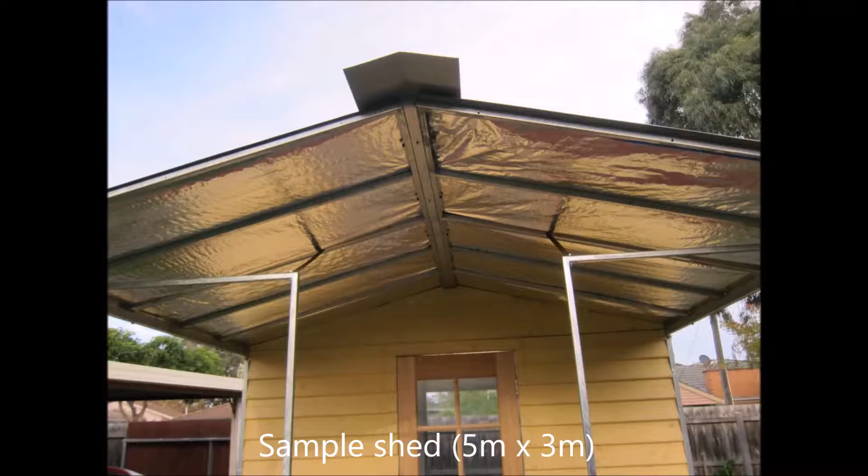Integrated Modular Outdoor Structures, IMOS, is specially and purposely designed for big hardware chain stores where maximum possible range of products should be presented to end customers with minimum possible investment.

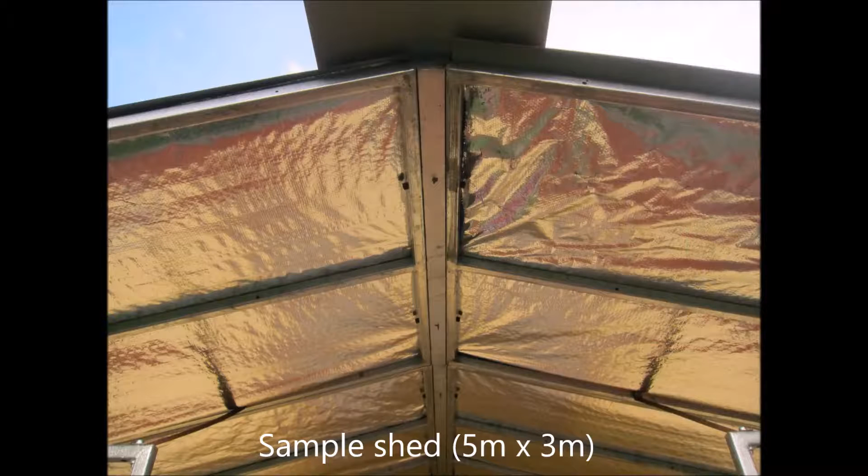An appropriate product must be cost-effective, easily stackable, user-friendly, do-it-yourself, easy to assemble and disassemble with minimum level of skills, easy to carry within store and by customers' small vehicles, easily extendable and retractable, light in weight, reusable, relocatable, long-lasting and durable, maintenance-free, sustainable, mistake-proof in assembly, and prefabricated and machined precisely.

After 4 years of working hard on this project, we believe all mentioned criteria have been met to satisfy big hardware chain stores' requirements. In this short video we are trying to show you brief information about IMOS's advantages, capabilities and competencies.

First, selling a very limited number of individual parts instead of heavy and bulky flat packages. We know that hardware chain stores, and even medium-sized retailers, prefer to minimize the amount of stock they keep in their warehouse to avoid heavy investment.

Using our online fully automated configuration system located on our website, warehouses don't have to stock huge amounts of goods, only a very limited number of products. Our system actually turns that around. How does this work? It's quite straightforward and efficient, in 3 simple steps.

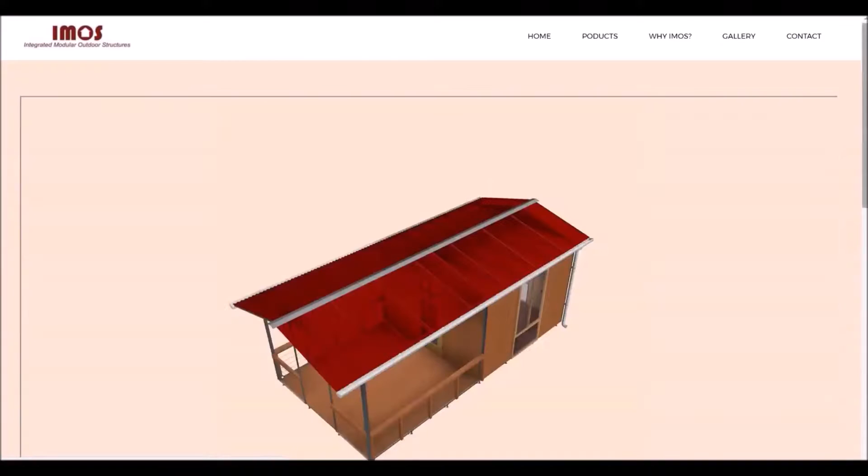Step 1: using our website, choose your own appropriate product, let's say a shed with 3 meters width. The 3D fully assembled product can be seen with acceptable resolution. You can also rotate the model around, or zoom in to get inside the 3D model to find out what the finalized product looks like.

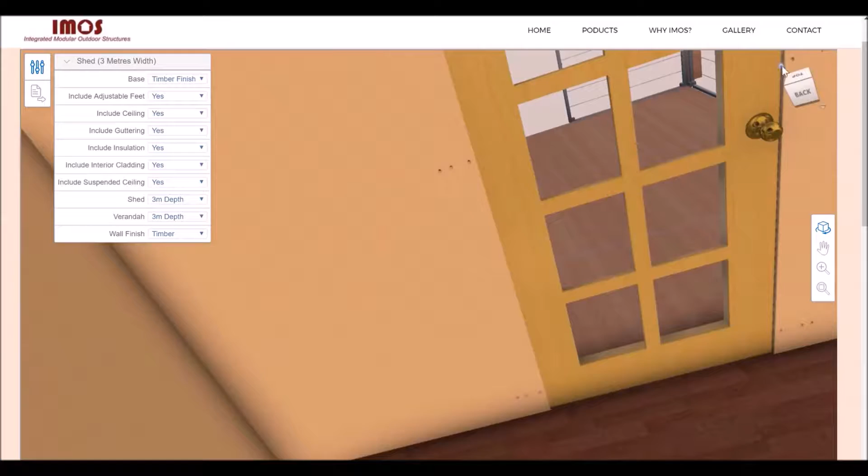Step 2: using the drop-down menus, pick your own desired parameters to make changes to your product. For example, in this product you can change shed depth, veranda depth, floor finish, wall finish, suspended ceiling, interior cladding, adjustable feet, guttering system, insulation, or even remove the roof to see what's going on with the suspended ceiling.

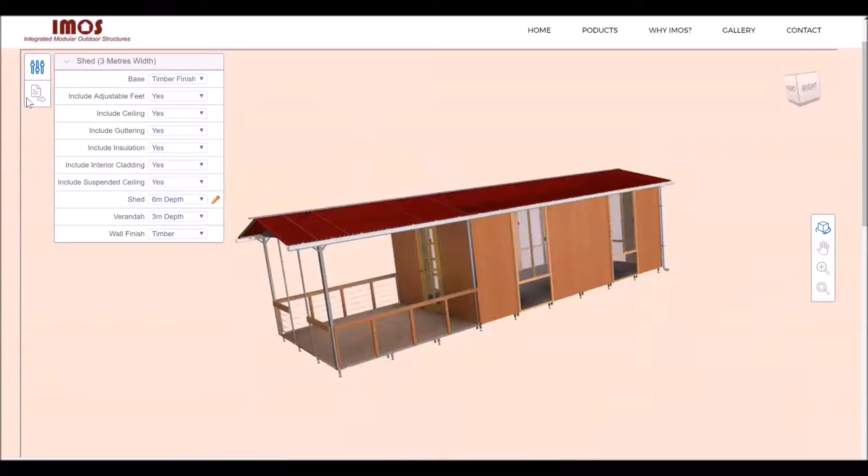Step 3: download the bill of material to see all the parts required for building the shed, including quantity, part number and description for each part. In the warehouse, each actual single part is labeled with a unique part number and description. The only thing the end customer needs to do is pick up the required labeled parts from the warehouse.

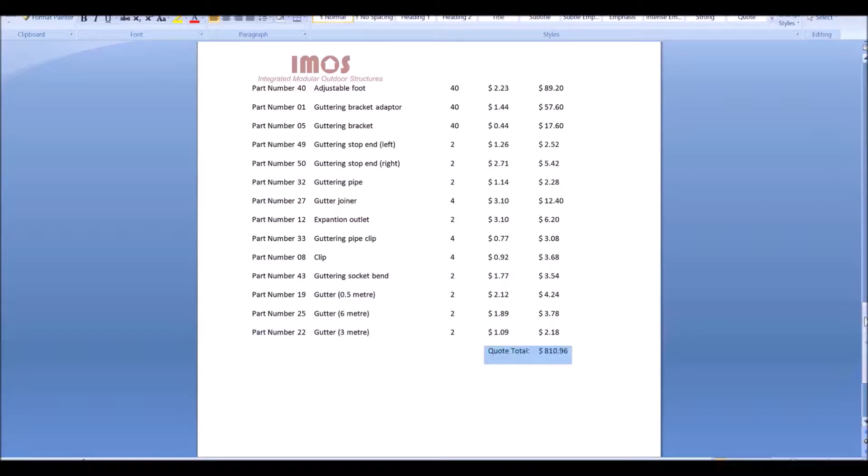Fourth, a fully automated instant quotation system. Customers can find out the total cost of the project, unit price and amount. Each time you change the parameters, the bill of material, total project cost, unit price and amount will be updated automatically according to the new product.

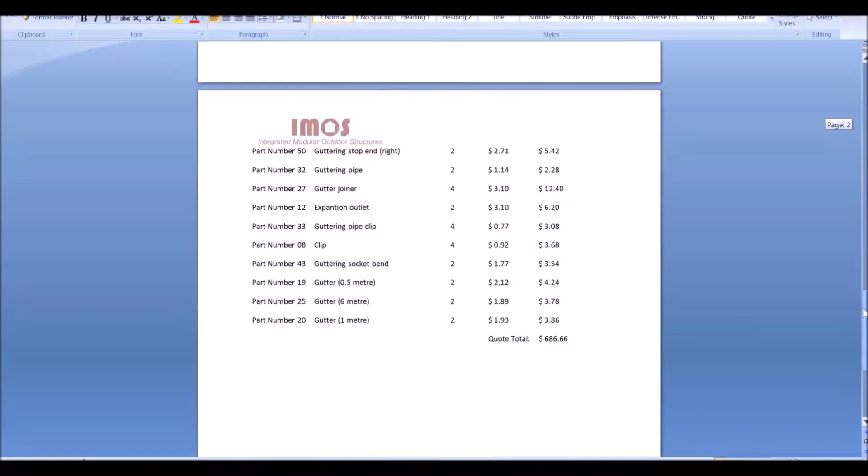Also, a photo of the finalized product and a short message to end customers is included in the downloadable document. Fifth, each product has its own step-by-step assembly instruction animation video.

You just need to play the related animation and follow the steps. In the animation video, each individual part is labeled with its unique part number and description.

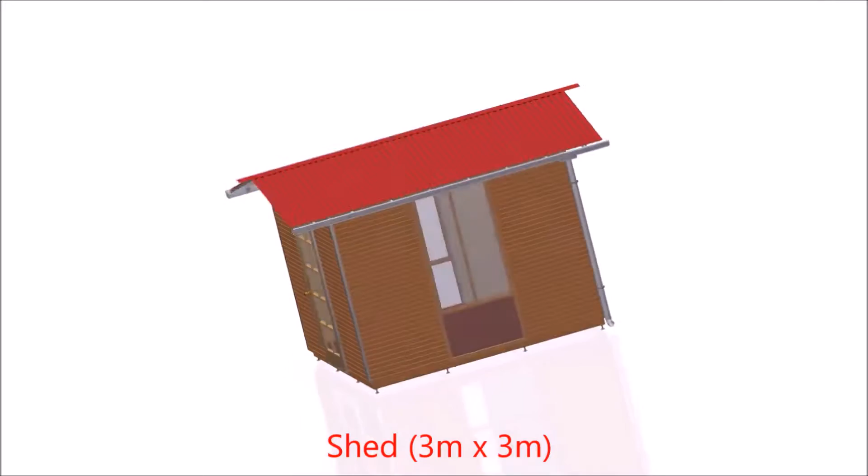Second, providing a quite wide range of products by stocking a very limited number of individual parts in the warehouse. This includes sheds with or without veranda in unlimited sizes and configurations. All the sheds can be extended in an interval of 1 meter longitudinally and/or laterally, up to infinity in all 4 directions.

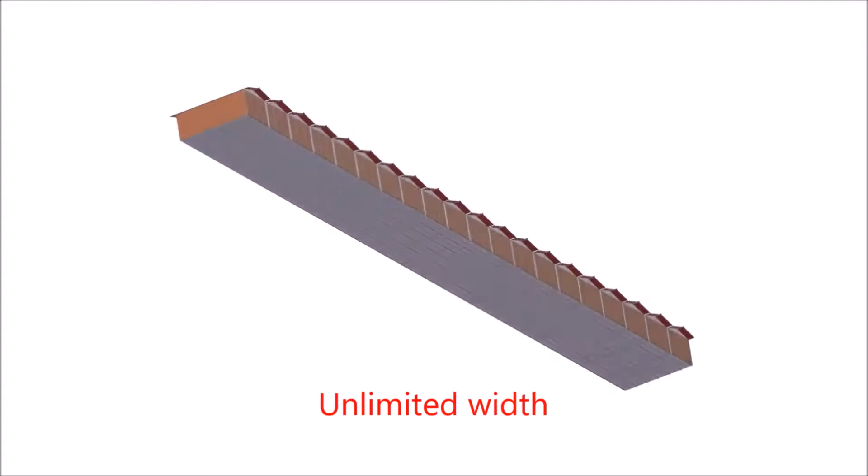For example, this shed can be extended, let's say 20 meters longitudinally and 20 meters laterally, which is 400 square meters of roofed area. Later in this video we'll show you how incredibly easy it will be assembling, extending and retracting the sheds.

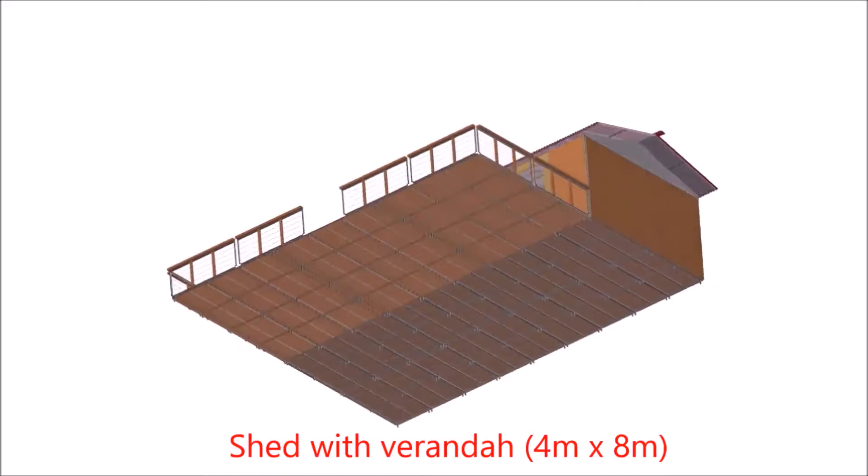The smallest size starts from 1 meter longitudinally and 2 meters laterally, so the smallest shed is 2 meters by 1 meter. There are different finishing options for walls and floors. For example, in the wall panels the exterior cladding can be wood or Colorbond, and in floor panels the finish can be particle board, laminate or tile.

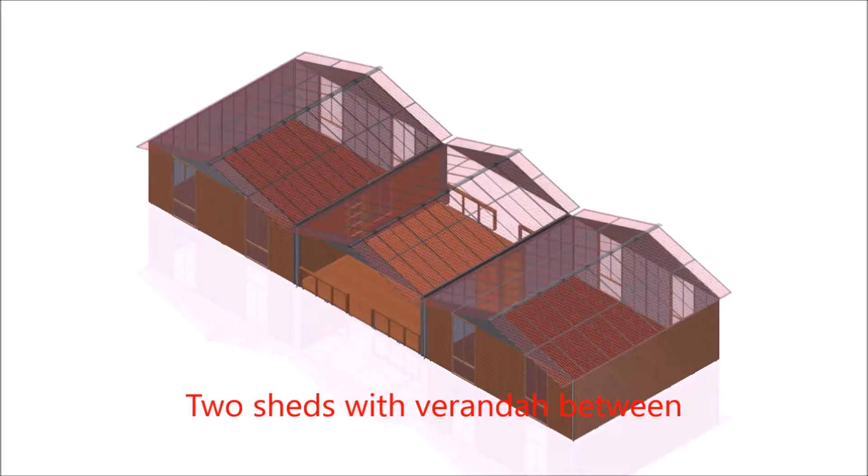Also, there are different levels of accessories, from entry level, which could be a storage garden shed, to high-end options which could be a granny flat, with suspended ceiling, interior cladding, adjustable feet, insulation and guttering system, which can be added optionally by end customers.

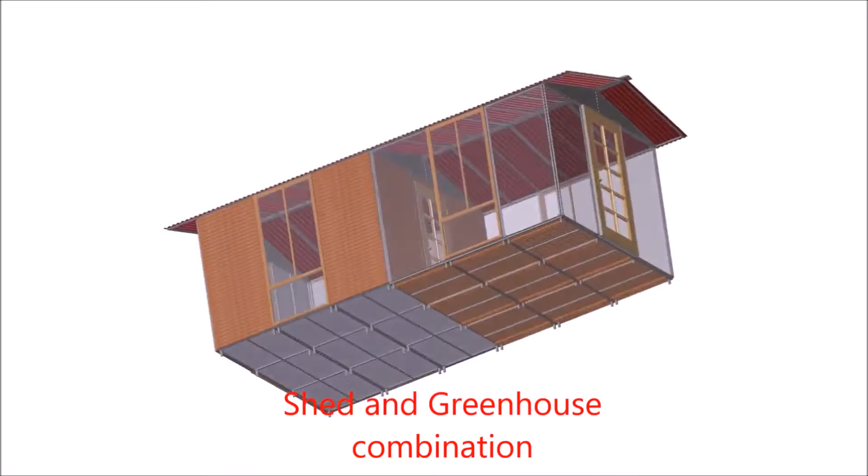All the sheds with any size and configuration can be built up and bolted directly into slab, soil, grass, asphalt or tile where the base being attached to the shed is not required. Adjustable feet in different sizes also can be used for any uneven or sloped surfaces.

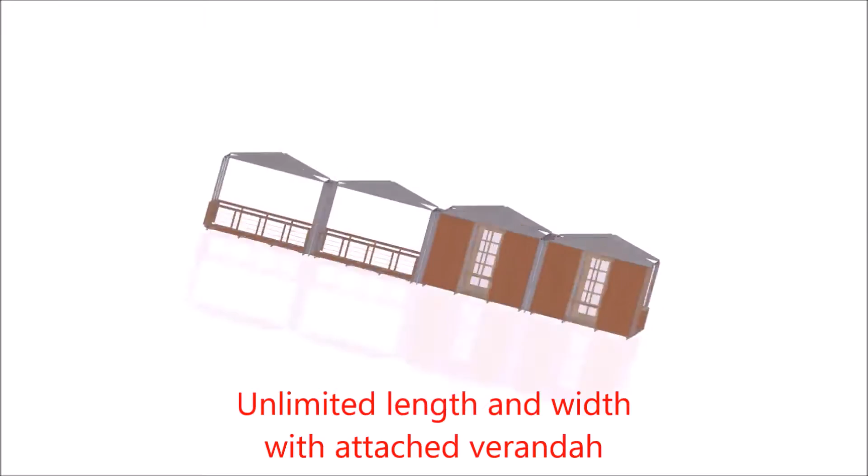There is also another optional section which can be attached to the sheds, which is roofed or unroofed veranda and or balustrade, which can be added to the sheds at any time even after full assembly very easily, once again in an interval of 1 meter longitudinally and or laterally up to infinity in all 4 directions.

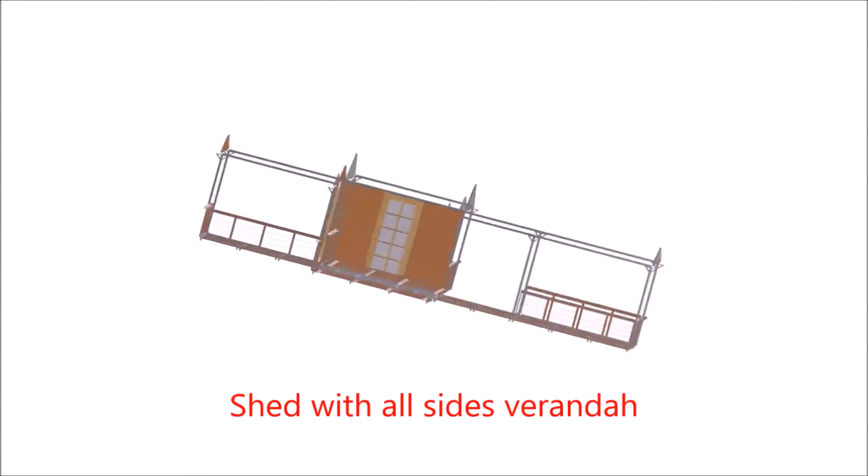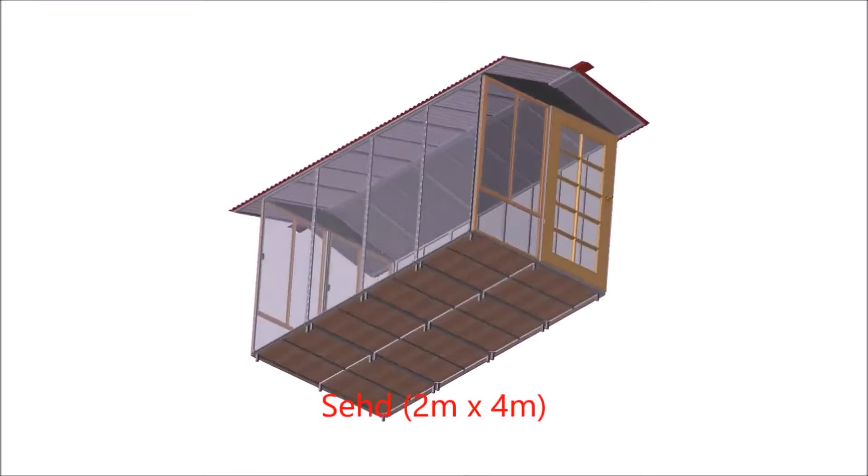Additionally, configuration of walls, windows and doors can be totally optional. It means all the wall panels, window panels and door panels are interchangeable with each other. For example, in this shed all the walls can be replaced with window or door or combination of walls, windows and doors. The only thing that end customer needs to do is swapping walls, window or door panels with each other as required in bill of material being downloaded from our website to work out the total project cost.

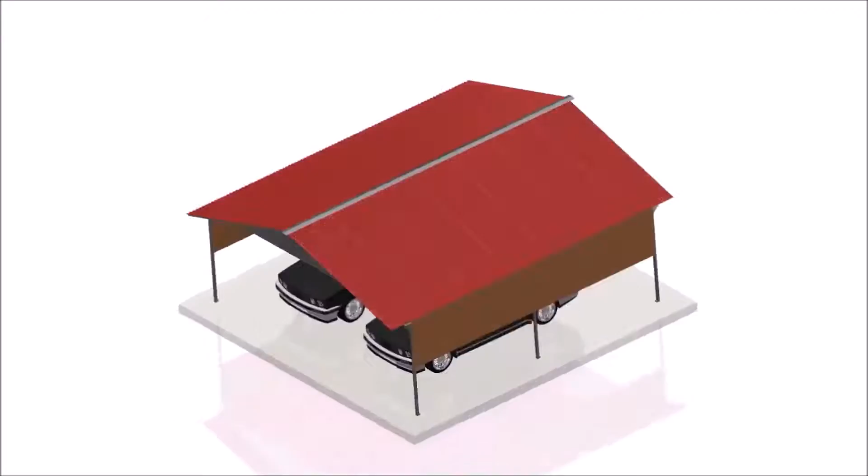B. Carports for 1 up to unlimited number of cars in different configurations. All the carports range is capable of extending in up to unlimited number of cars. It can be extended in an interval of 1 meter longitudinally or laterally in both directions.

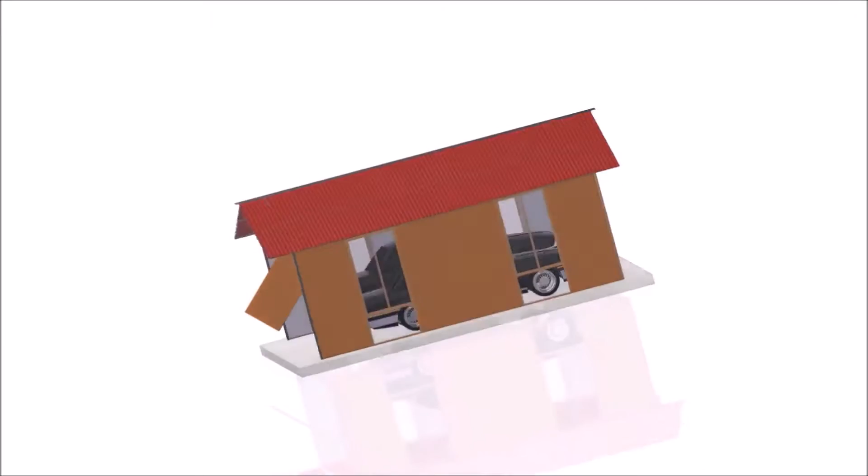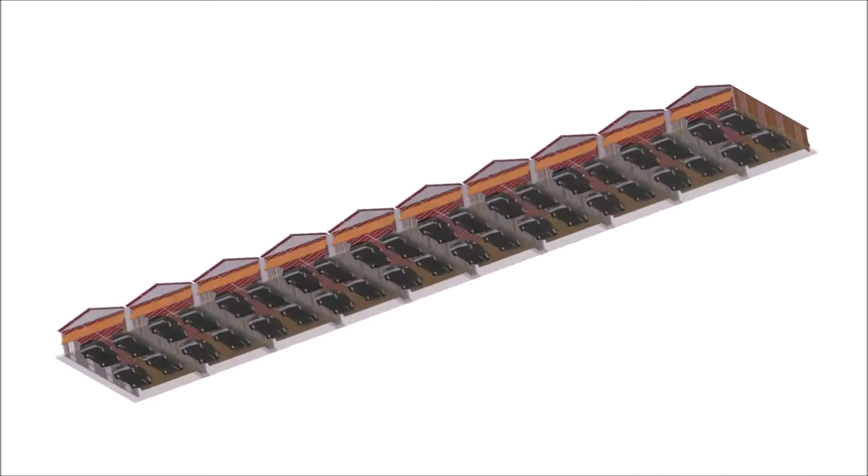C. Garages for 1 up to unlimited number of cars in different configurations. All the garages range is capable of extending in up to unlimited number of cars. It can be extended in an interval of 1 meter longitudinally or laterally in 4 directions. All of specifications are quite similar to the shed other than base, which in garages there is no base, as the garage walls can be bolted directly into concrete slab, soil or grass.

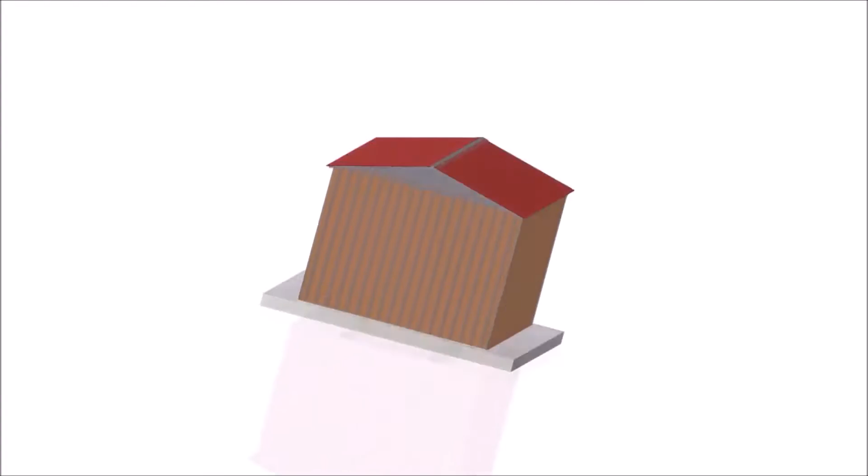Automatic garage door and all its accessories, which is sectional or tilt door, comes in one separate pack for single or double garage with individual single part number and can be installed in one or both ends of garages. All the door parts and accessories are prefabricated, pre-drilled, pre-measured and fully welded, ready to install for end customers.

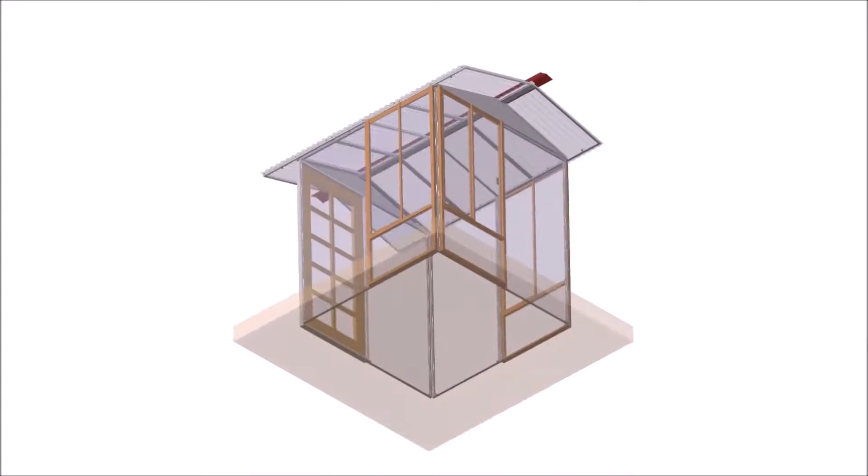D. Greenhouses with or without veranda in unlimited sizes and configurations. All the greenhouses can be extended in an interval of 1 meter longitudinally and or laterally up to infinity in all 4 directions. Greenhouses are quite similar to sheds and its accessories, but in greenhouses wall panels being swapped with glass panels and also in roof panels instead of Colorbond, clear polycarbonate corrugated roofing being used.

As you can see here, each glass panel can be swapped with window or door panel, as many as required. All the bases in greenhouses are water resistant.

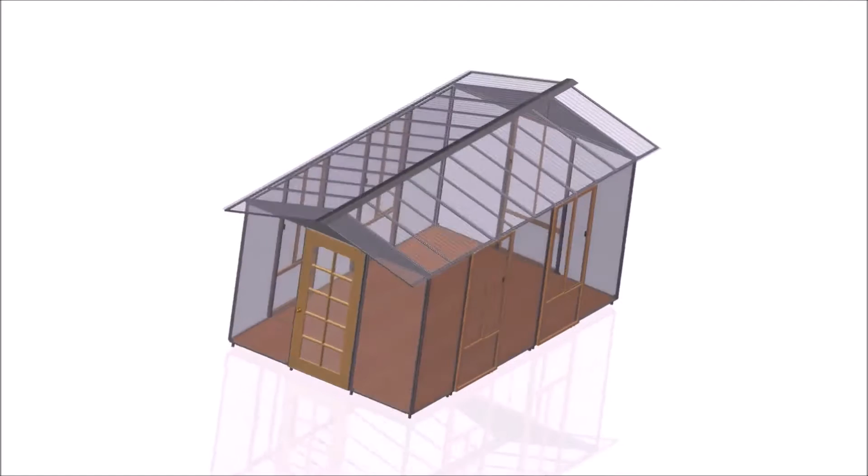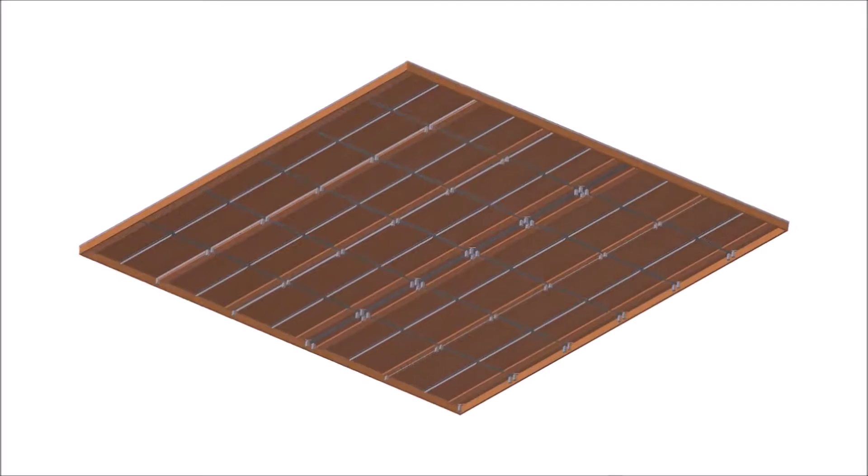E. Decks in unlimited sizes and configurations. The smallest size of decking module is 2 meter by 1 meter and it can be extended in 4 directions up to infinity longitudinally and or laterally in an interval of 1 meter with adjustable legs in different lengths suitable for sloped or uneven surfaces. All deck modules are raised freestanding and can be installed on every surface like grass, concrete slab, asphalt or soil.

F. Gazebos in unlimited sizes and configurations. All gazebos can be extended from 1 meter by 2 meter up to infinity in 4 horizontal directions. Modular balustrade is another optional choice for 1 or more sides of gazebos as required.

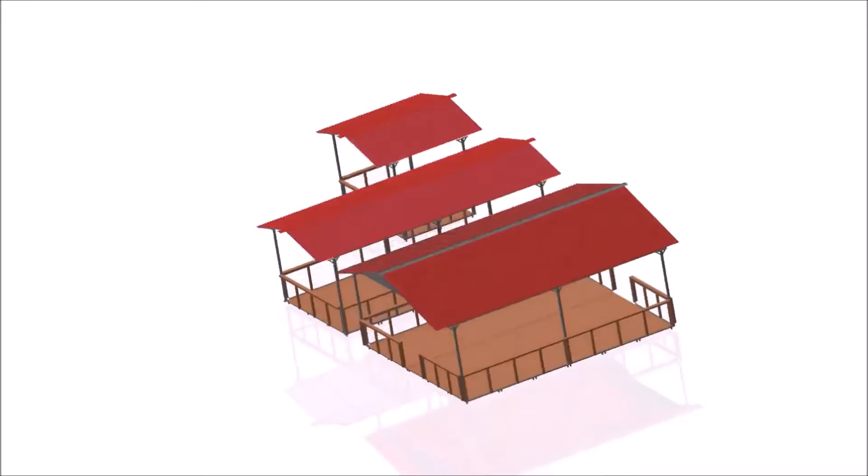G. Stages in unlimited sizes and configurations. Stages are actually raised decking panels with longer adjustable legs for temporary or permanent use. Like decking panels, this is also extendable up to infinity in all directions.

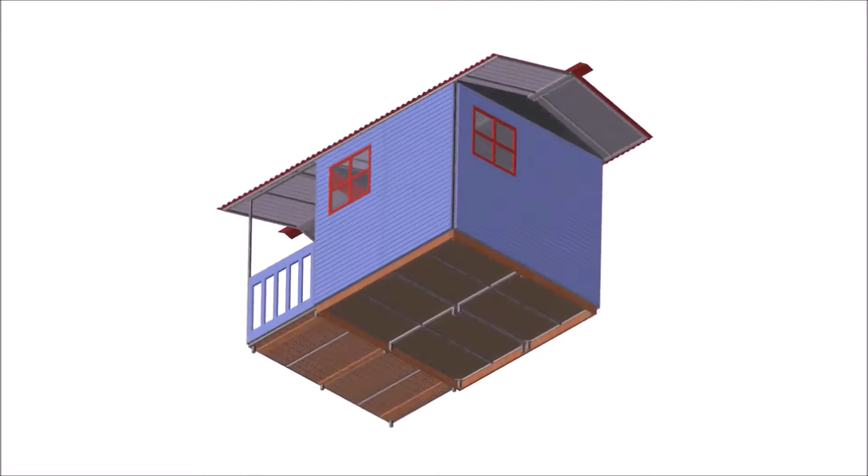H. Cubes in unlimited sizes and configurations. All cubes can be extended from 1 meter by 2 meters up to any required size. They can be built up with or without base.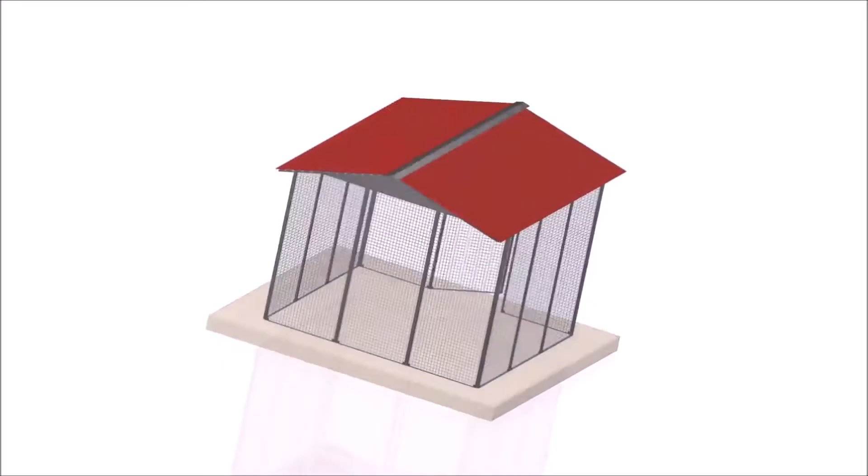I. Playsets in different configurations, with same assembly instructions for other products. Playsets with different arrangements can be built up. J. Kennels and aviaries in different sizes. This can be made with or without base modules and different sizes.

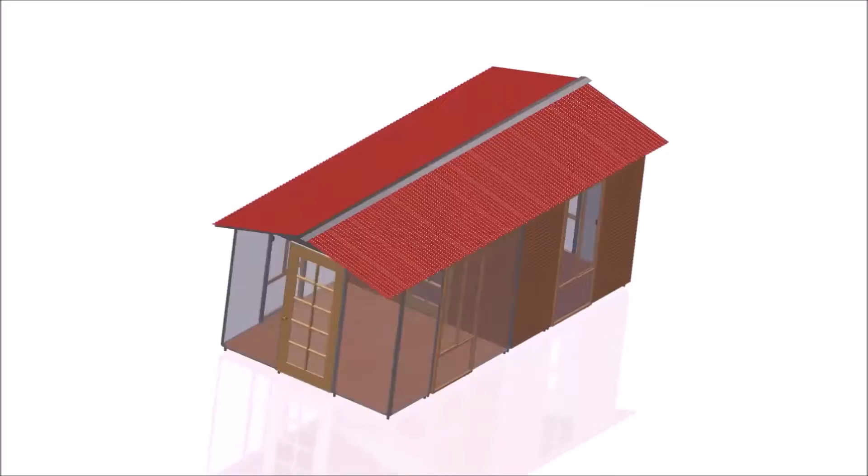K. Endless combination configurations. Combination of different products is possible to configure and customize numberless shapes and arrangements, resulting in a vast range of configurations based on end customers' requirements. We believe this gives customers the ability to use their own creativity and idea to create new and unique configurations and arrangements inspired from their requirements. These are just a few out of numberless possible arrangements, as it is impossible to show you all.

3. Easy to assemble and disassemble. Basically, all parts are particularly designed for end buyers who have minimum level of technical skills.

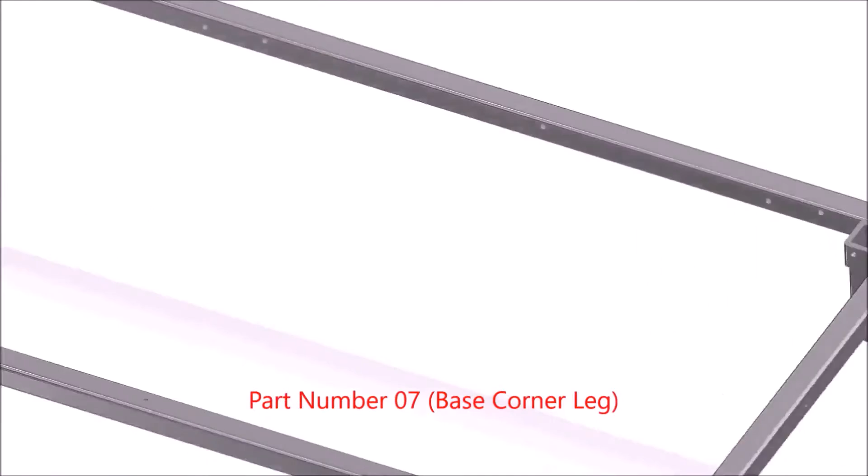Anyone who is able to use basic tools like an Allen key, screwdriver or spanner, and lift a weight around 15 kilograms can assemble all range of products. The only required tools are an Allen key set, single-size hex socket, middle-size spanner, step ladder, and level, in sloped surfaces.

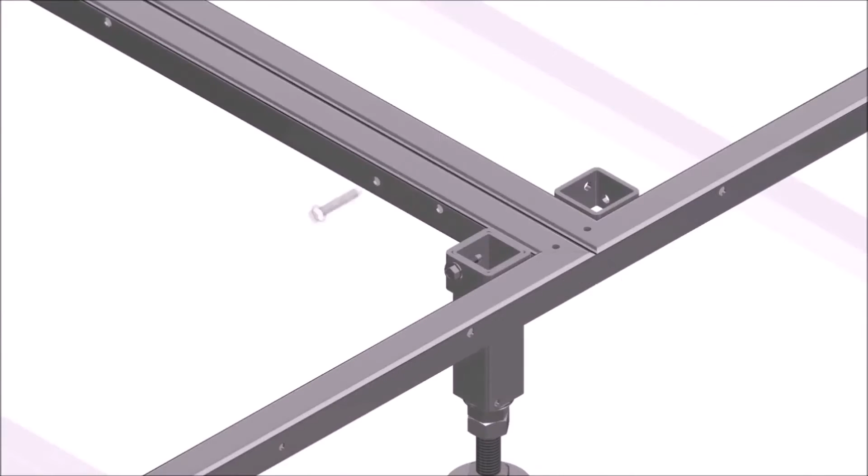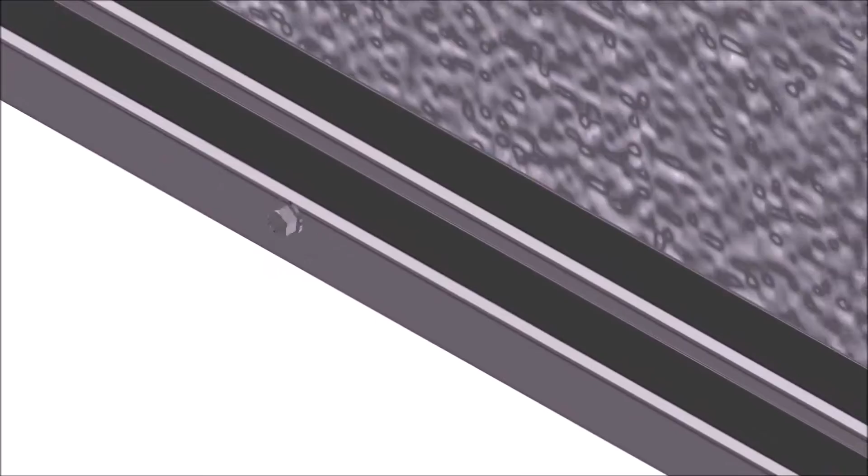Unlike other existing modular structures, no drilling, no ground digging, no hammering, no nailing, no sawing, no welding, no measuring is required at all. Another advantage is that ceiling assembly is precisely designed to avoid the assembler climbing on the roof, meaning all roofing assembly takes place from under roofing areas to reduce hazard risks and speed up assembly time.

These advantages make it very quick to assemble and disassemble, resulting in saving time and costs. Number 4: minimizing health and safety hazards. These advantages clearly show that safety issues and considerations are noticeably reduced, resulting in decreasing insurance costs.

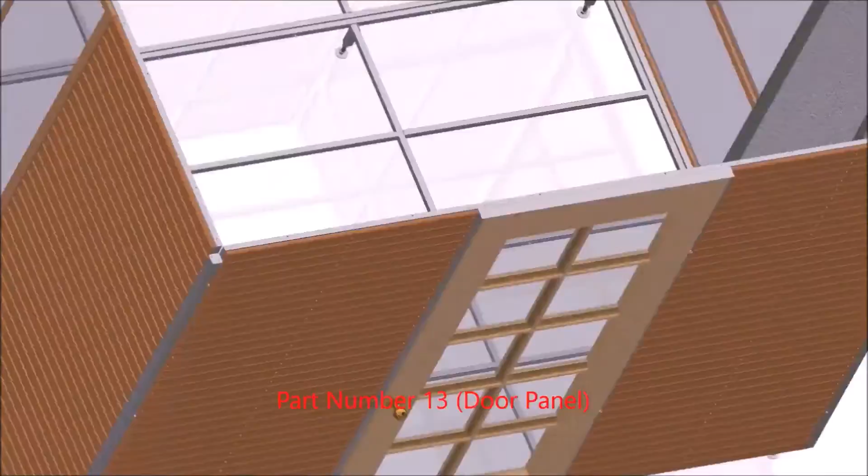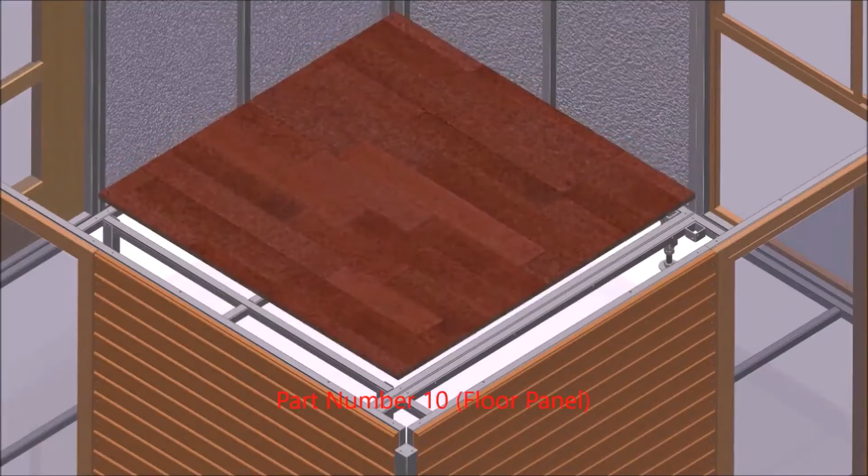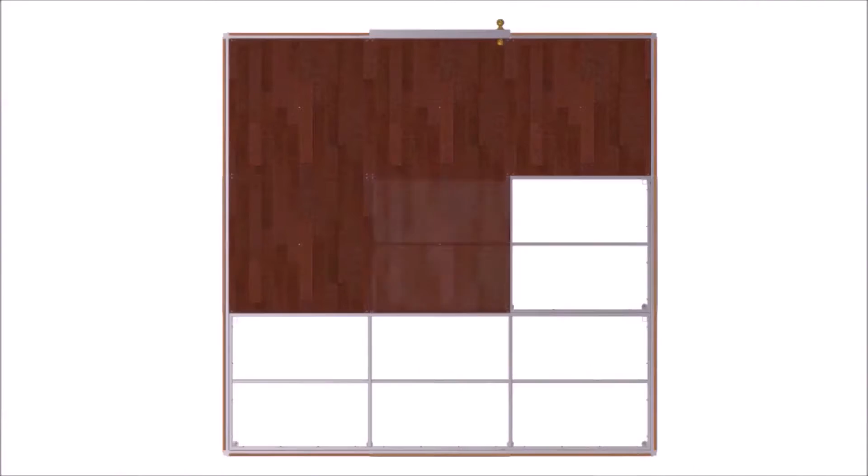Number 5: temporary usage and relocatability. Ease of assembly and disassembly makes IMOS products a suitable option for temporary use across a wide variety of our products. Although assembly and disassembly of all IMOS products is quite easy, quick and straightforward, they are absolutely freestanding, firm, solid and unshakable structures.

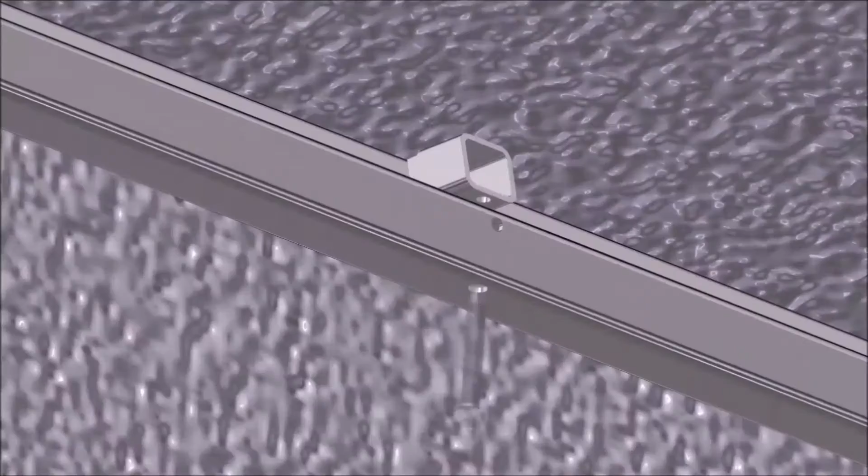This is because in design considerations we always try to avoid and eliminate permanent joiners purposely, such as nails, glues, rivets, welds, adhesive insulation, etc. This capability is great for places where short-term structures are required, such as building sites, rented properties, non-permanent exhibitions, and so on. If for any reason the end user would like to change from one product to another, the majority of main parts can be used in other products as well.

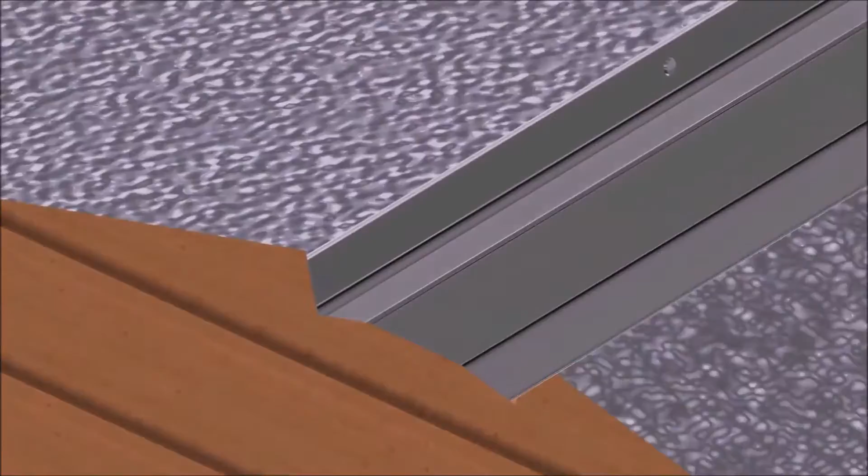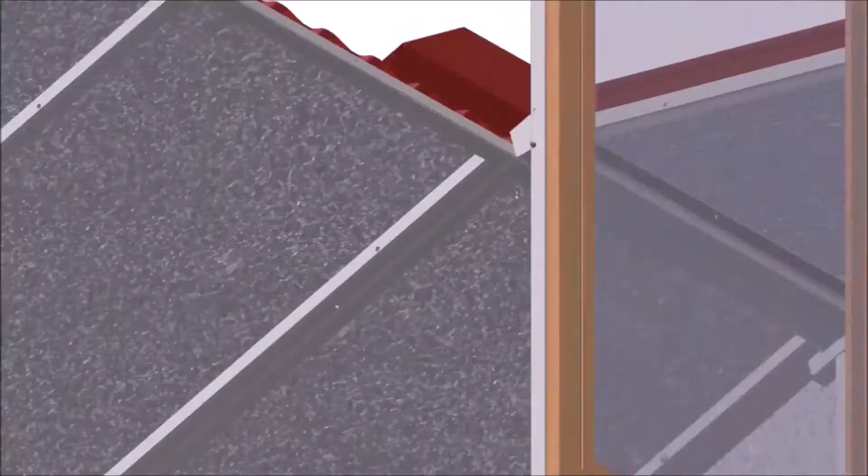Number 6: very limited number of stocking parts. In this system we've always tried to minimize the number of stocking parts as much as possible to reduce required space for stocking, so that each part has multiple applications in different positions and products. To achieve this, each part has multiple functions to increase efficiency and effectiveness as much as possible.

For example, the roofing system is the same for all products in the range. Number 7: durability, strength and accuracy. All the structures and modules, including frames, are made out of durable rectangular or square hollow section stainless steel 304 grade or galvanized steel as requested.

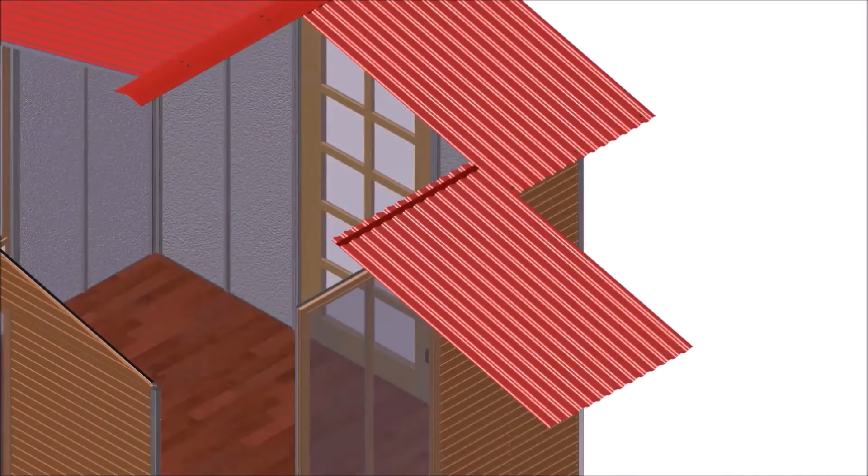With minimum thickness of 1.5 mm, parts are prefabricated, precisely CNC machined, fully welded, pre-drilled with fastener holes, and pre-measured in accurate fixtures. We offer Western red cedar or treated pine for exterior wall cladding, and merbau for decking.

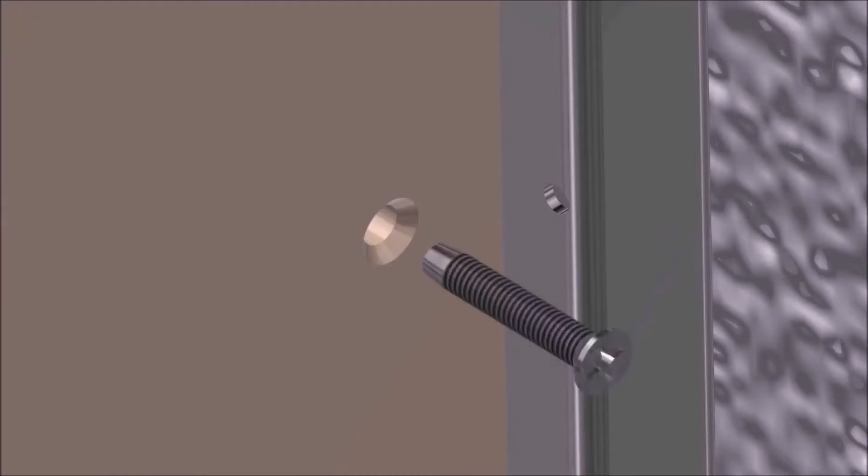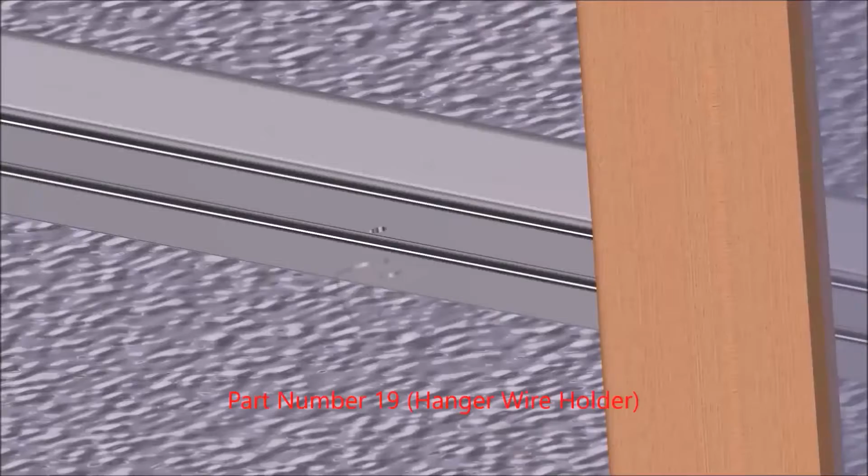Number 9: easy to transport and deliver. All the parts are designed to occupy as little space as possible, as the biggest part is 6 meters long, 0.8 meter width and 0.1 meter height, if 6-meter width structures are needed.

This helps customers transport required parts with their own vehicles easily. Since all parts are provided separately to consumers, they have their own choice to carry them in multiple trips. Number 10: water and wind resistant.

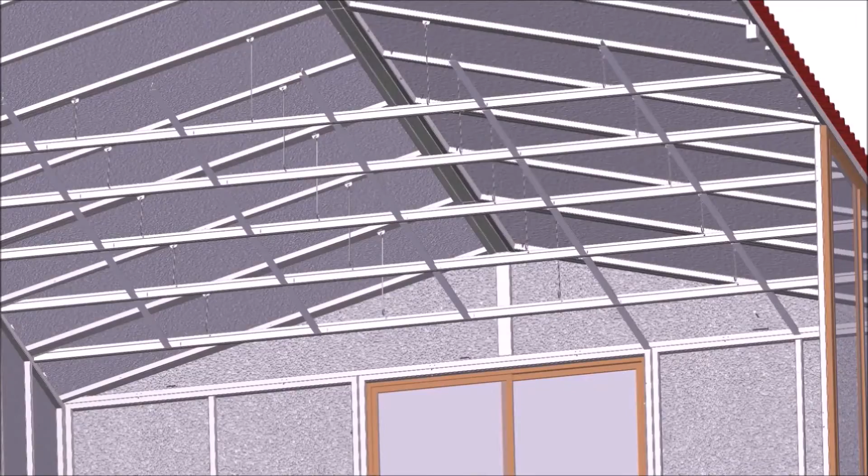Without applying any kind of adhesive, water or wind sealant, or insulation, even in ceiling components, all the products are 100% waterproof. The entire range of products is strong enough to resist wind in any harsh weather condition.

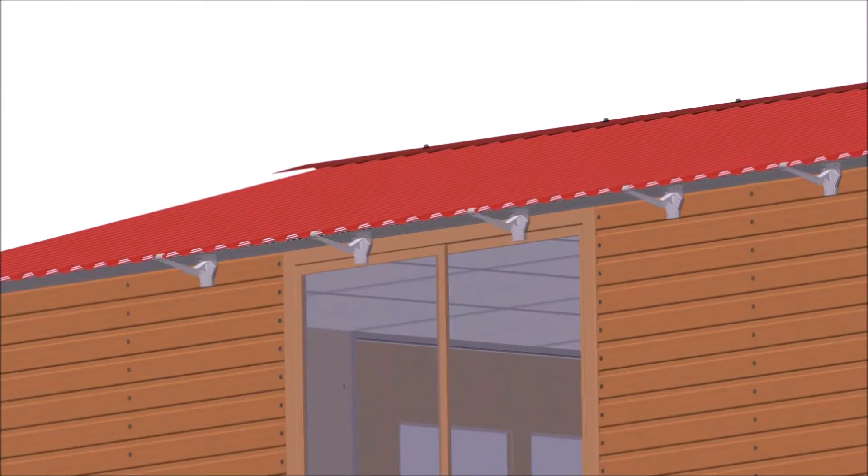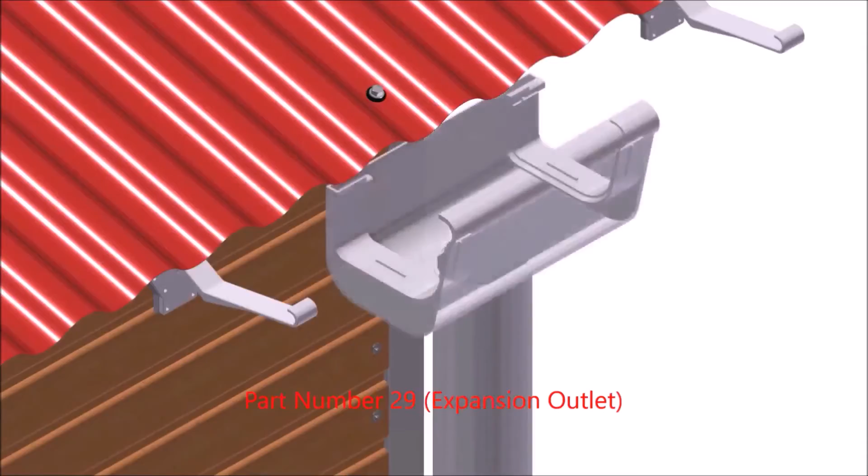Number 11: interchangeable parts. If for any reason the end user would like to change from one product to another, let's say from shed to cubes, the majority of main parts, in this case for example all roofing and floor panels, are exactly the same and can be used in other products as well.

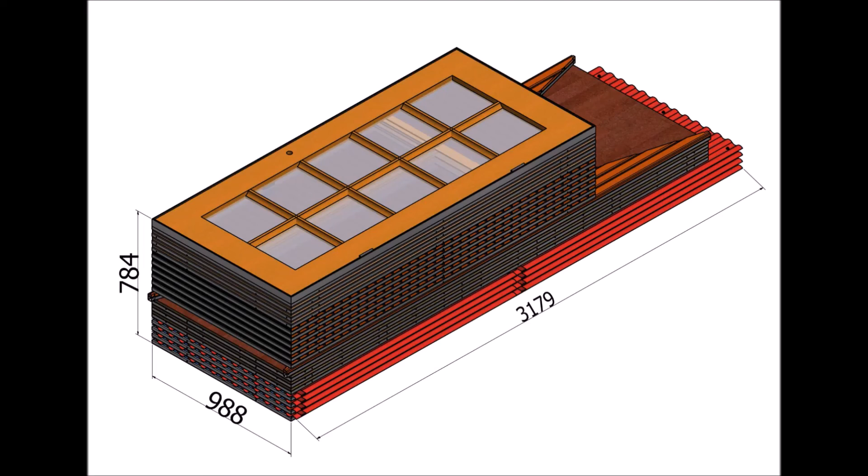Number 12: stackability. All the parts, especially bigger ones, are capable of being stacked horizontally or vertically in a manner that minimizes wasted space between them as much as possible. As you can see in this example, the required room for a 3 meter by 3 meter shed, including attached bases, is only 3179 mm by 988 mm by 784 mm.